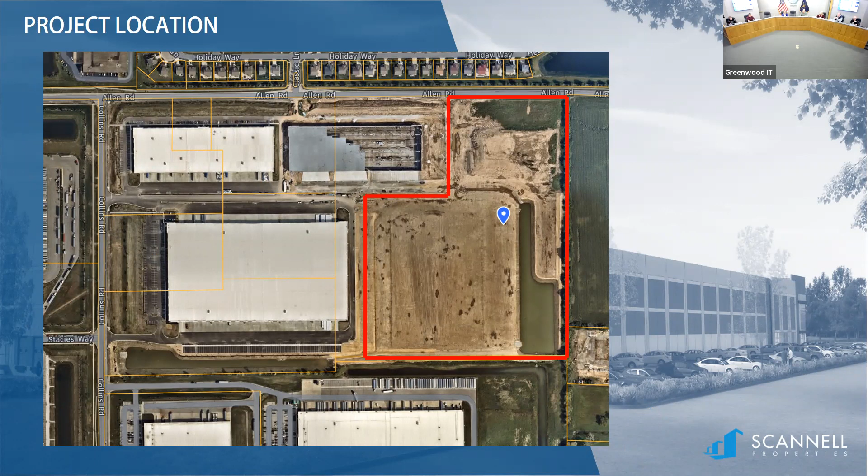So this is going to be the project location. It's going to be located within our existing Worthsville Commerce Center developments. Specifically, the overall project is going to take the remaining 2 lots within this development, lots 4 and 5. This will be a great way to round out our project if we are able to move forward with our development.

This is just a concept site plan that's been provided by our build-to-suit tenant. It's not representative of an engineer's drawing, but it does give a good representation of what the final site plan is going to look like. Our end user here is going to be a freight distributor who's proposing to utilize a metal panel building within the dock section, which I can explain further a little bit later on, but wanted to give a quick high-level overview of what the site plan looks like.

So with our first variance request, our request is to allow a side elevation to be clad in a permitted material other than the dominant material at the front facade.

So with the strict requirements with our build-to-suit tenant, how they essentially construct their building is the office pod, which is going to be located nearest to Allen Road. That's going to be all your typical tilt-up concrete panel, precast panel, whatever they decide to go with there. So that area is going to be cast in the typical precast panel.

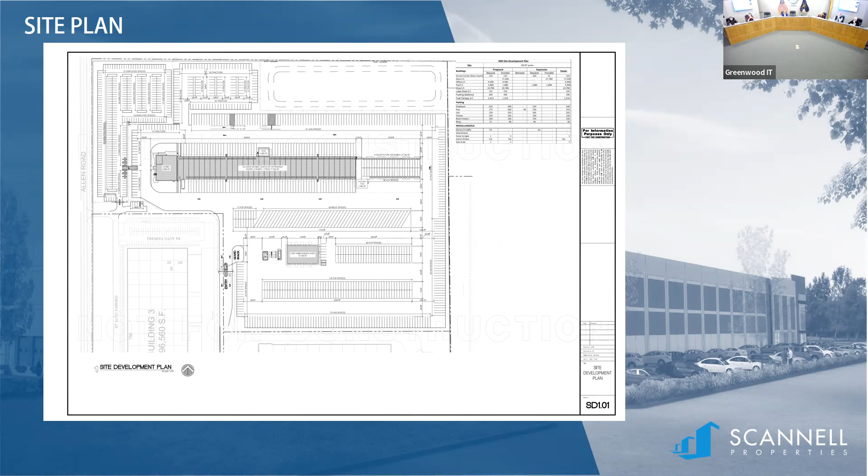The side elevations, specifically the dock area, the way these service docks are constructed and how the building's constructed, being a clear span pre-engineered metal building, the typical precast concrete panel is just not a viable construction material for use in this particular area. Without getting into too much detail, it creates structural issues with the precast panel, the building slab, the construction doors. It's just been found to not really work as a material in this type of building.

As far as our project goes, we intend to utilize a textured smooth wall metal panel on the side elevations, which is intended to mimic the look of a precast concrete panel as closely as possible. I do have a sample of that panel that I can share with the board so you have an idea of what that's going to look like.

The proposed panel carries a 20-year warranty and can be repainted as needed. I know that's always a maintenance concern with a new material - how long is it going to last, and is it going to erode quicker than the typical panel would? We like to say this isn't your typical 1980s concrete panel with the ribs. The technology's come a long way, and it does carry a pretty significant warranty.

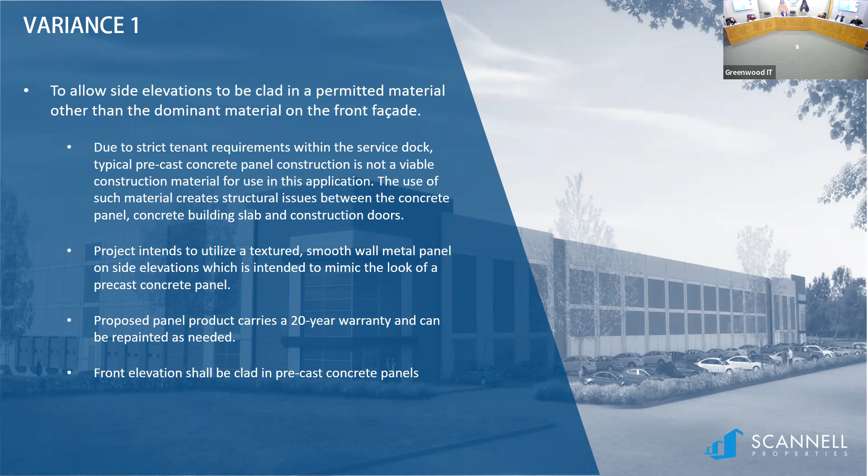With that, our tenant is one who likes to stay in the same spot once they're in. I shared with staff that it's going to be an expensive facility to construct for them, and once they're in, they don't really like to move. So it would really be a cornerstone to this development and Greenwood as a whole area. As I mentioned, the front elevation would be clad in the precast concrete panels.

So with that, this is just a representation of the building elevations. As noted, the north elevation facing Allen Road is going to be all concrete panel. It's going to be the textured concrete that's required in this development, and is really going to be the front-facing portion of this.

That office pod wraps around the east and west elevations, but then from that office pod south is going to be clad in the metal panel. The only exception to that is what they call a dispatch pod - it's essentially a remote office located kind of in the center of the east elevation. That'll be precast as well, as opposed to the metal panel.

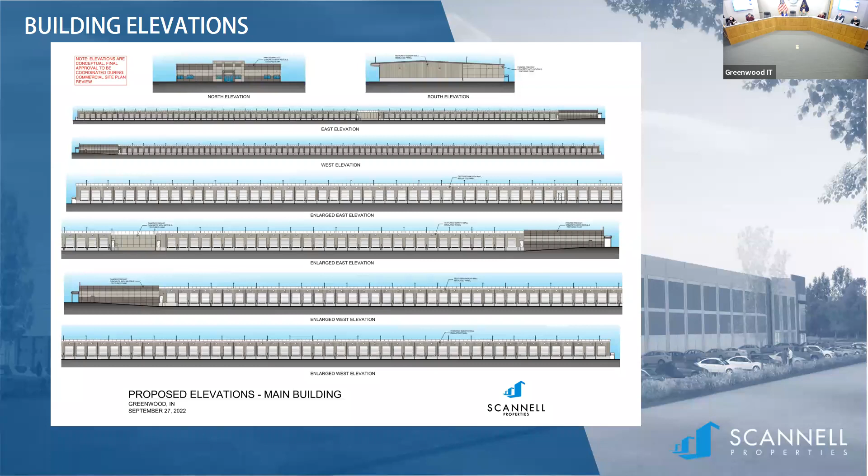With that, before I continue on, I will break out my sample panel. This is representative of what the final product would look like. The color might not be the exact same - that's going to be determined by the tenant - but that gives the representation of what we would be placing on the side of the building. It'd be concealed fasteners, and from the distance this building's going to be viewed, it's going to essentially look like a smooth wall. So I'll get into finding the facts.

The approval will not be injurious to the public health, safety, morals, and general welfare of the community because the locations where the alternate material will be used occur on either areas of the development which have a matching zoning designation, which is IL, or agricultural zoning with minimal existing development.

Large screening berms and substantial landscape plantings will be constructed along the Allen Road right of way, as well as the east property line, and that was a part of the commitments to this property. The landscape berm, if you've driven past this area recently, is a 12-foot tall berm with substantial landscape plantings along Allen Road and a 6-foot berm along the east property line.

And again, the selected material will be designed to mimic precast concrete panel. The use and value of the area adjacent will not be substantially affected. Again, the large screening berms and landscape plantings blocking the public's view, with the design intended to mimic the concrete panel as best as possible.

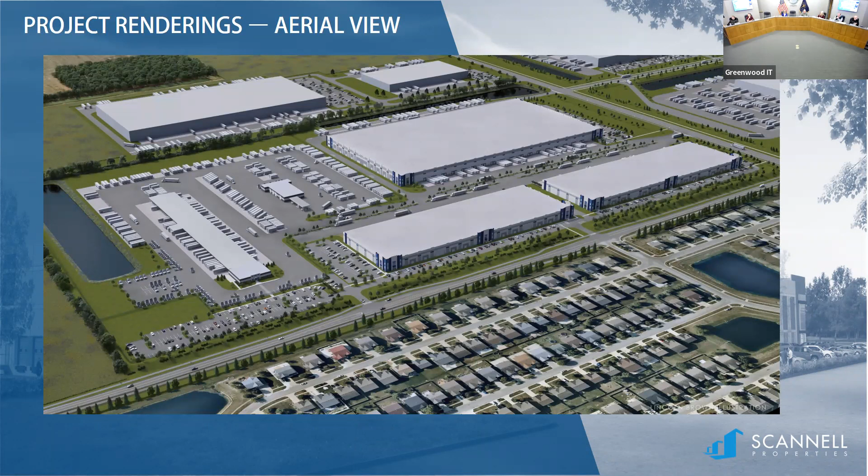As we move down Allen Road, this is in the center of our lot. You're really not going to see the building due to the height of the berm, as well as the height of the building. This building is actually a little bit shorter than what's out there existing due to the use of the building, so further screening it from view.

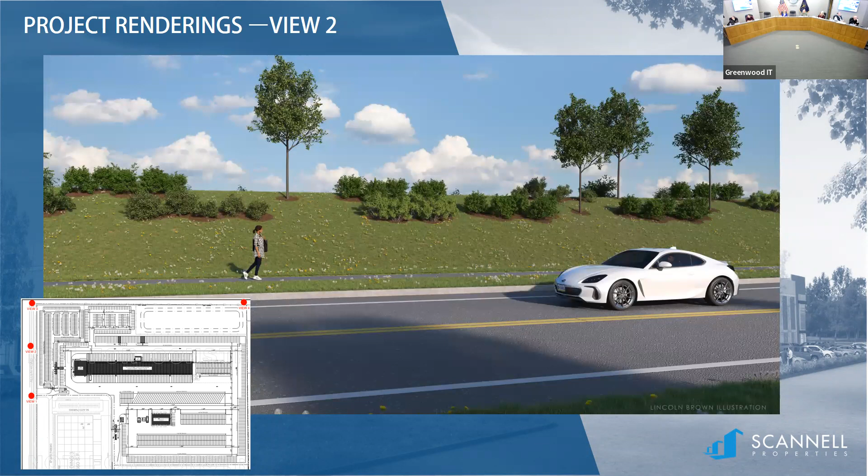Here's the corner of our site. Again, it's really not visible from the right of way. And then down at the southeast corner, looking across the detention ponds, it's somewhat visible, but from the distance you'd be looking, you're really not going to be able to tell that this is anything but just an industrial facility.

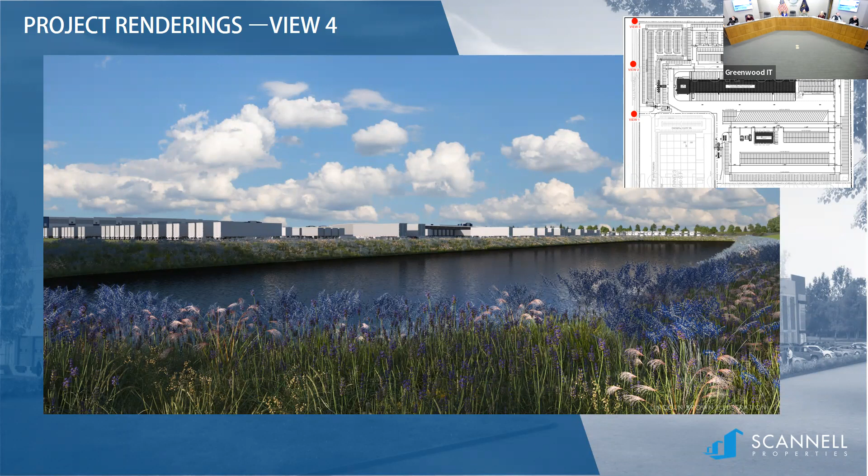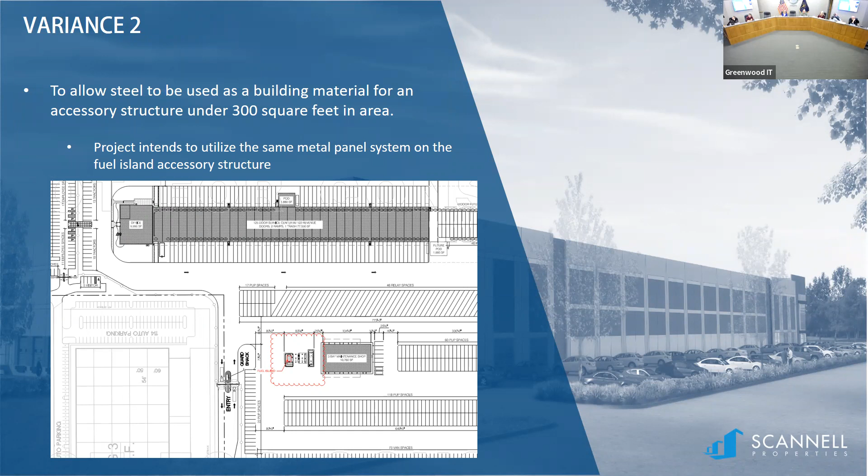Moving on, our variance number 2 is to utilize steel as a building material on an accessory structure under 300 square feet. We intend to use the same panel on the accessory structure as on the primary building. Again, just the way the ordinance is worded, it specifically says we can't use steel on accessory structures.

The approval will not be injurious to the public health and safety. For a lot of the same reasons, the proposed panels would match what is provided on the side and rear elevations of the primary structure. Metal panels are an approved use on accessory structures; it's just specifically not steel panel, how it was written. And the landscape berms and plantings will block this accessory structure from view right away.

Continuing on, the use and value will not be affected due to the berms and it matching the material of the primary building. Strict application of the zoning ordinance will result in difficulties simply due to the size of the structure we're using it on, about 200 square feet. Concrete panel is again a difficult material to use on an accessory structure like this, and our intent is to match the materials on the primary building.

Continuing on, the last one, variance number 3 is to allow a fence up to 10 feet in height to be placed in the front yard of the building. Again, going back to tenant requirements, their employee lot is enclosed in a security fence to help protect their employees as well as the employee vehicles.

This is a 24-hour operation, so some employees on the latest shifts will be coming out in the middle of the night, and they like to have that added security factor for their employees and vehicles left on site. I'll note that we've requested up to 10 feet, but we don't intend to utilize something up to 10 feet. That 10 feet is simply to match what's allowable in all portions of the development. More than likely, it'll fall between the 6 and 8 foot range.

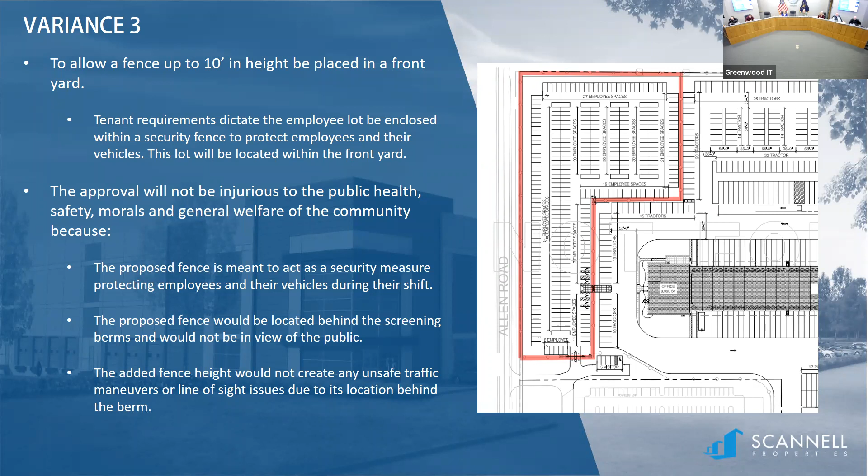The use and value of the adjacent property will not be affected. Going back to the landscape berms, broken record, but you're not going to see much behind those berms. And again, the fence is meant to act as a security measure, reducing incidents of theft in the area.

Strict application of the terms of the zoning ordinance would result in practical difficulties simply because the security measure would not be permitted around the employee lot, reducing safety of employees and their vehicles, and forcing the tenant to have additional monitoring and policing of their pedestrian parking lot. So with that, I appreciate you taking the time to listen to our presentation. I'll answer any questions the board may have.

First, just for all three, I want to note that the structure is not regulated under Indiana Code 8-21-10-3 for hazard to air navigation.

Anything else, anything from staff? I noticed their findings were favorable. The only condition was the final plan substantially conforming to the building elevations. I think it is indeed. Exactly.